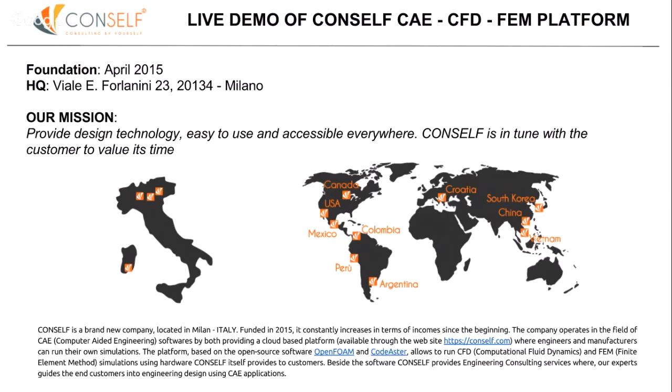The service we offer is a cloud computing service, so directly from the website, with a simple registration using an email and password, you can access a complete CFD (computational fluid dynamics) and FEA (finite element analysis) software. These are based on well-known open source tools such as OpenFOAM for the CFD part and CodeAster for the finite element part. Directly from the website, it is possible to upload a step file, create a mesh, run the simulation, and also analyze the results, like we are going to discover today during this live webinar.

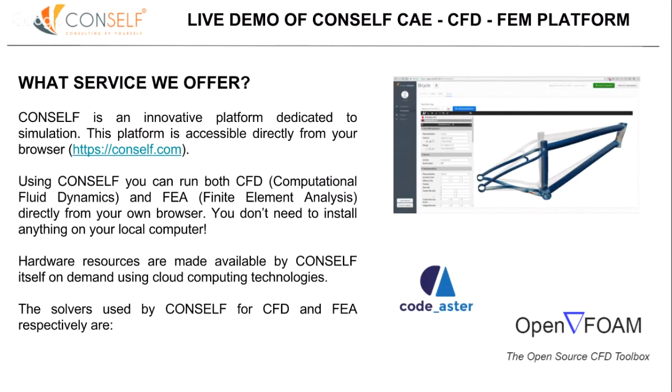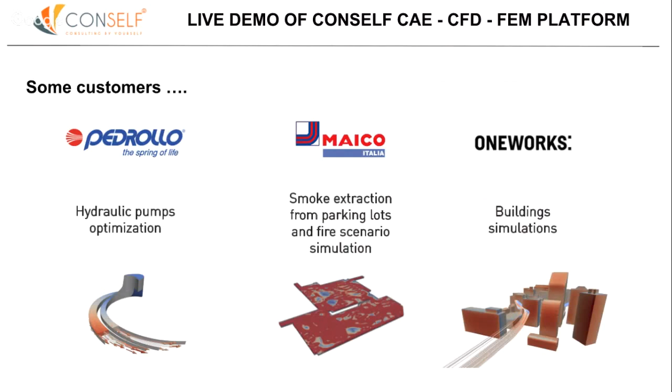Some of the customers currently using the application are Pedrollo, Maico Italia, and OneWorks. We picked these three customers because of the fields where they apply the simulations: the first field is pump analysis for Pedrollo. For Maico Italia, we have fire scenario simulation in car park lots. And for OneWorks, we have building simulations, so city and pollutant distribution in a city, but also wind pressure on buildings analyzed to calculate the structure of the building.

So now we are entering a little bit more into the details of today's webinar, and we are going to discover how you can simulate a simple impeller using Conself.

I added here 2 or 3 pictures to make the simulation we're about to run as clear as possible. On the left-hand side is an impeller, a particular tool that, through a rotation occurring along the vertical axis in this picture, creates a suction force for the fluid - water in particular. Because of the centrifugal force, this fluid goes through the channel and exits radially through the impeller, in all radial directions.

This is a complete impeller, but we are just interested in a slice of it. Why? Because we can take advantage of the axial periodicity of the impeller, so we just simulate 1/8 of the total impeller in order to save computational power and be as accurate as possible with the least amount of cells.

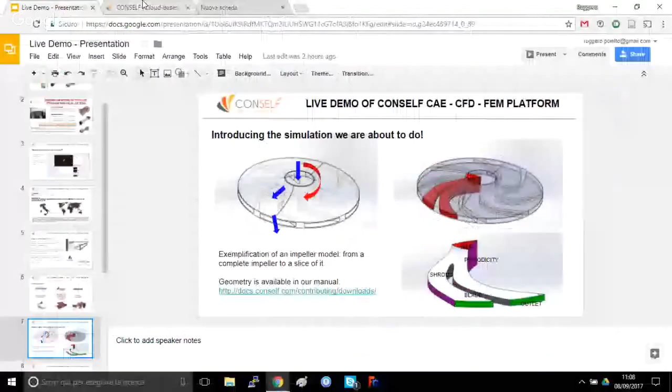So we are moving now to see the Conself CFD simulation. I am on my own browser, Google Chrome, but you can use any browser you want. To access the application, you have to go under the My Account page.

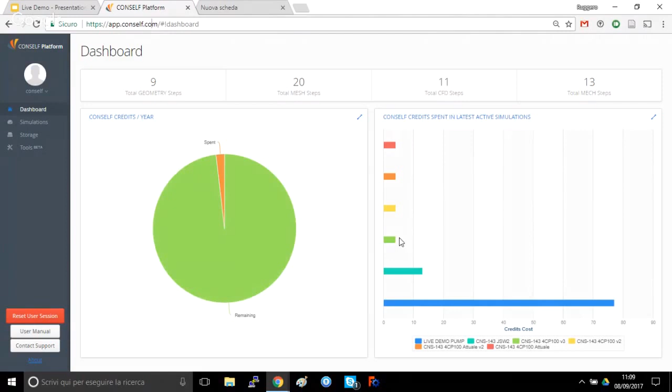Login, if you haven't done that already you can register using any email address and defining a password, then click the big button Start Your Cloud Simulation. This redirects you to app.conself.com, from which you can actually start the simulations.

So today's webinar is a simple pump. I'm about to create a new case, naming it pump. The new case uses the CFD Turbo single rotating frame application, so I click on the create button. Sorry, I did it wrong, so I just retype pump, reselect the application, and click create.

After the page loads, I am redirected to a guided procedure from which it is possible to define the simulation. The first thing we have to do is upload the file. As I said previously, we're going to use our manual to download the file to our local machine and re-upload it to the system.

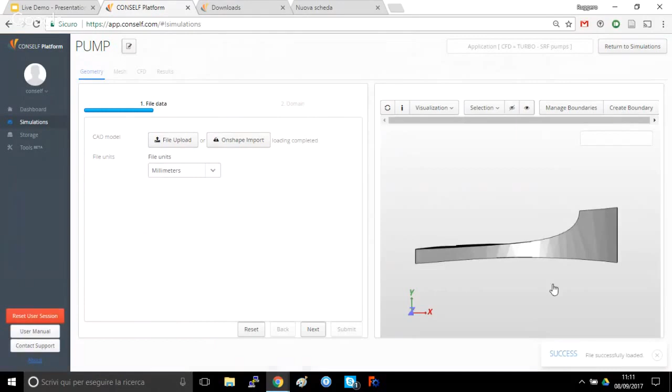So we use downloads, and there is a number of files available to users for their own tests. This time we use the Impeller fluid.stp file. We simply click it and it downloads to my computer. So from here I can upload this file: go to downloads, Impeller fluid, open. Most step files are rather small in size, so the upload won't take long. This is the Impeller as we saw previously in the presentation.

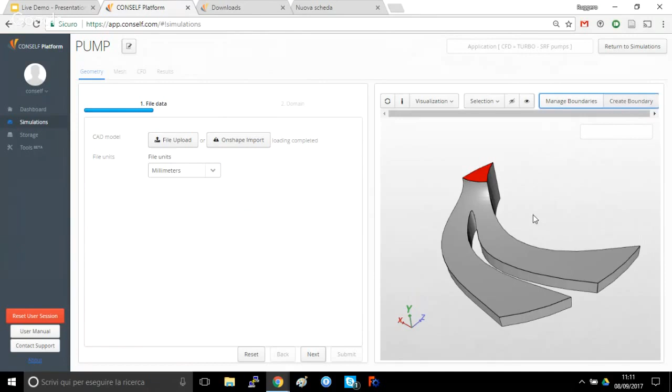The first thing to do in Conself is the definition of the surfaces group, as we saw earlier. We click on the top surface, it becomes red, we create this and define it to be an inlet. We click on the outlet surfaces.

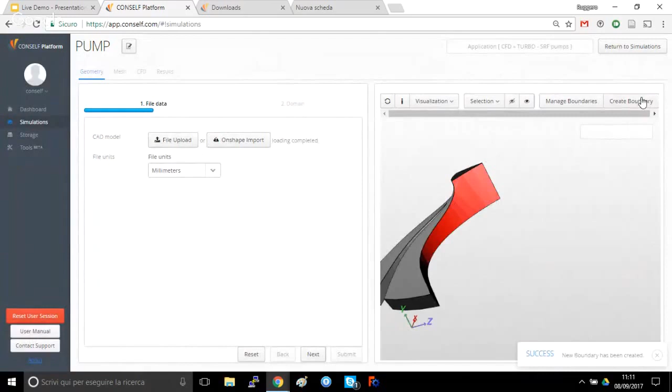Then we have the two periodicity surfaces, so we call them perio1 on the left hand side, and create boundary perio 2 on the right hand side. We also have the blade at the center of the impeller, and the top and bottom surfaces are instead hub and shroud.

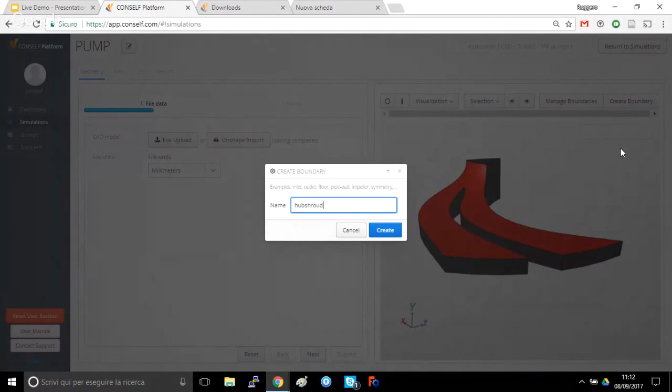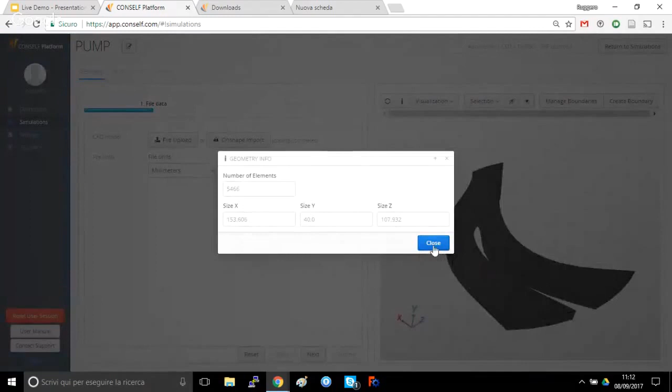So now the full geometry is defined, there are no more free surfaces to define, and I can proceed with the guided procedure to set up the simulation. I click on the information tool to know the bounding box, the maximum dimension in X, Y, and Z - as you can see it's 107 millimeters in the Z direction, so I leave the file units as millimeters.

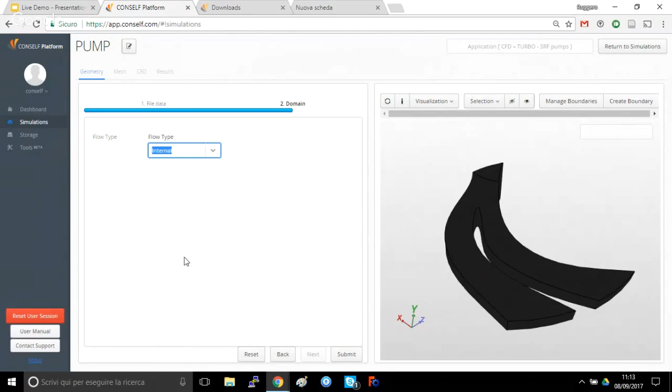I can proceed with the definition of the flow type, and in this particular app I only have one option available, so there's nothing much to say. I click submit and press run.

As you can see, the process now runs in the background, and it does not run on my own computer but is performed on the Conself server. All the computing power required to run the CFD or finite element analysis is taken from Conself, rented by the user, and as we'll see later, the pricing scheme takes into account only the computing power used by the user in a pay-per-use system.

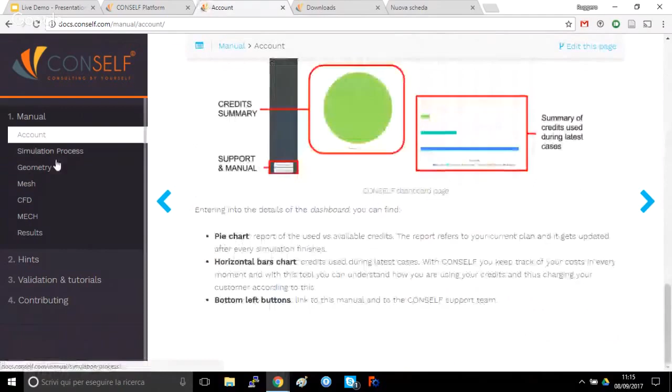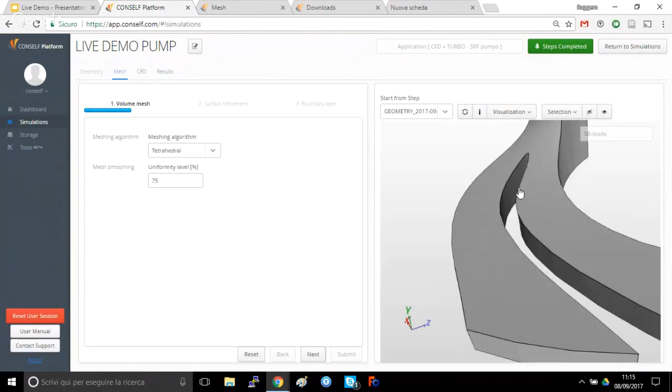This step is taking a little time, so we're going to use a previously prepared simulation to see what happens after the geometry. After the geometry, what we have to define is the mesh. I have the geometry available as specified in the previous simulation, and step by step I have to define all the input parameters to define a mesh.

The first parameter is the meshing algorithm, which for this particular case, related to single reference frame rotating pumps, we suggest using the tetrahedral meshing algorithm. Then there are other parameters such as the uniformity level, which for this case we impose to be 75%.

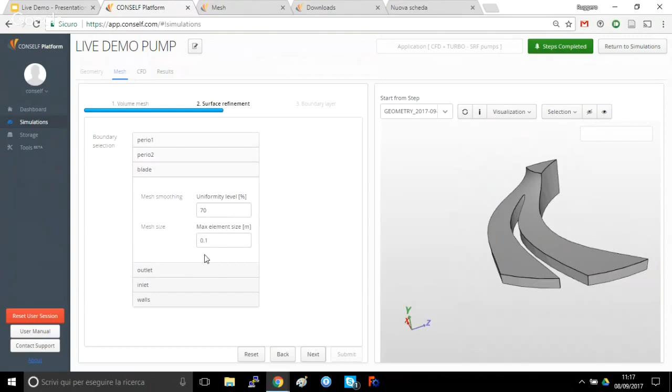I carry on imposing the input data we discussed, and move to the next section, which is useful to define the boundary layer. This is an extra refinement, very useful to be applied on all surfaces where we want a wall boundary condition. In our case, the wall boundary condition is going to be applied on the blade.

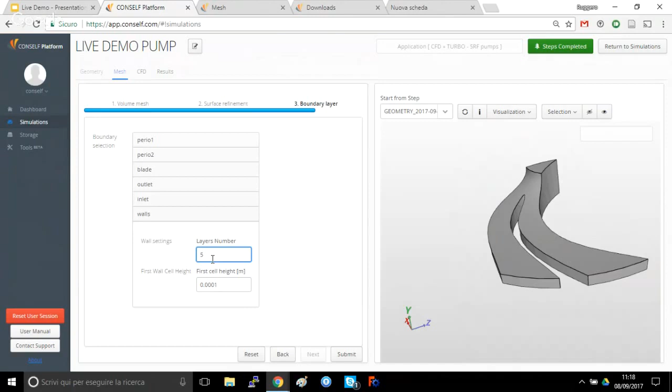On the blade we apply a certain number of layers with the first cell height to be 1/10 of a millimeter, so 0.0001 meters. But this is not the only wall we have in our simulation - we also have the wall boundaries, which are the top shroud and the bottom hub. On these two solid boundaries, we apply an extra refinement of 5 layers of cells, with the first layer height also at 1/10 of a millimeter.

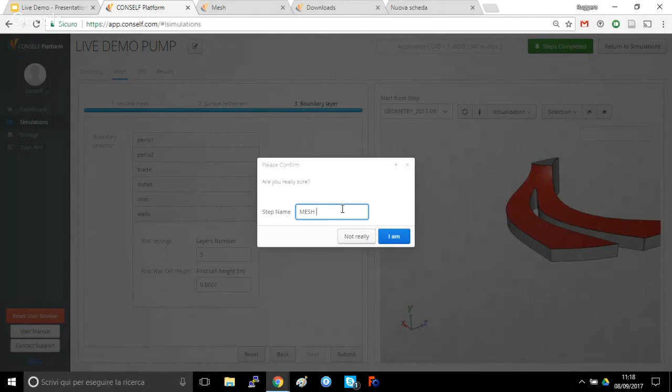We submit the mesh now, and it's possible to give a name to this particular mesh, so we call it 'mesh tutorial'. Now when I click, the system automatically takes into consideration the mesh which has to run, and here it is.

The process runs in the background. As we can see, it's possible to run a very high number of processes together on the system, and these processes are simulated and processed by our system. Most of the time the queuing time is rather limited, within about 10 minutes, and we have a scalable system underneath, so all processes are taken one after the other by the system.

Because of the limited time I have available, I'll proceed using a previously run mesh. I'm just going to select a mesh which I previously defined.

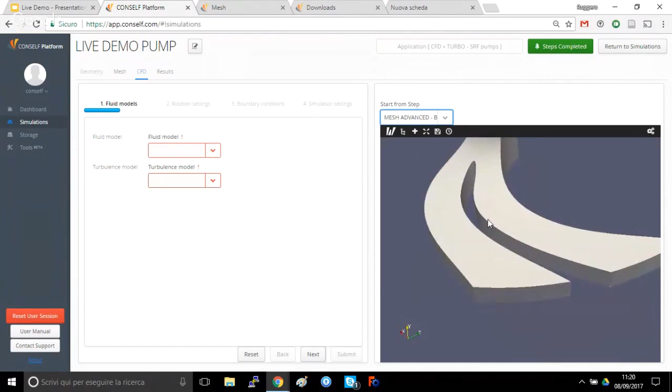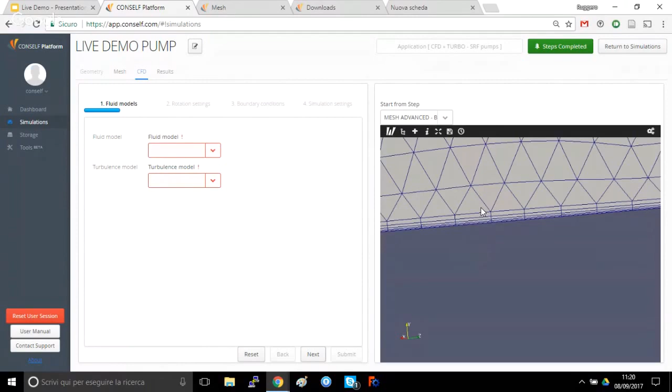Automatically on the right hand side I can see the impeller again, but this time it's not just the impeller, it's the volume of fluid divided into a number of fluid volumes, as we can see. You need to get familiar with the number of inputs - here we can see the layers number, the imposed boundary layers, and the internal mesh on the inside of the impeller.

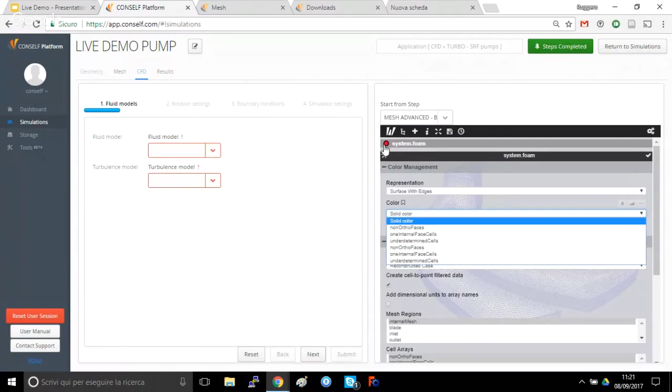Well, now that we are happy with the mesh, obviously there is much more to say, like reports about mesh quality, which are actually given by Conself as non-orthofaces, and a number of variables from which you can extract problematic cells out of the mesh.

You can proceed with the definition of the fluid model, incompressible, and the turbulence model, which I suggest you to use Spalart-Allmaras. But we also have available standard K epsilon and K omega SST turbulence model.

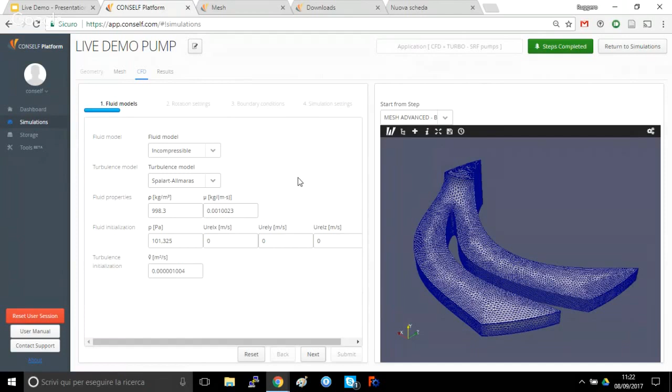So I can move on and apply the rotation to the impeller. This particular app we are using is a single reference frame system. So all the fluid volume is defined as in rotation. So everything we have to define is a center of rotation and a rotational axis, which is the vertical axis

in y direction. The rotational speed, as most of the time for pumps, is about 1,500 RPM here in the EU, where the frequency of the current is 50 Hertz. Obviously, in other countries, this value might be slightly different.

We can proceed once again and define the boundary conditions for all of these. So we can define the periodicity rotation for period 1, and once again, the periodicity rotation also for period 2. Then we have the blade, which is a rotating no slip with obviously a 0 rotation. Remember that this 0 is a relative rotational speed, so it is a rotational speed relative to the rotational speed of the fluid volume.

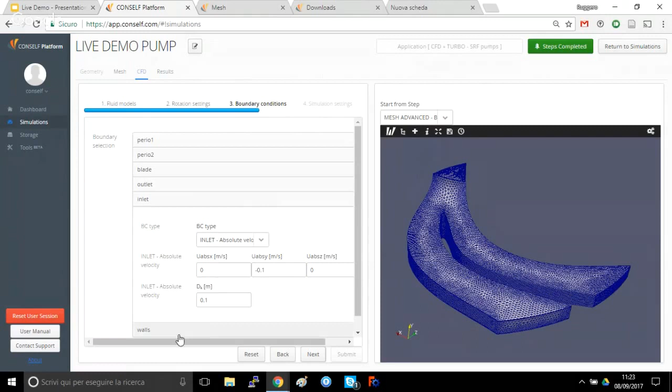Then we have the outlet, for which we just define a pressure outlet. And we also have the inlet, for which we want to apply an inlet absolute velocity of minus 0.1 meters per second, so vertical direction inwards, inside of the domain. The last boundary is once again the wall boundary, which represents the hub and shroud, so top and bottom walls, let's say, of the impeller.

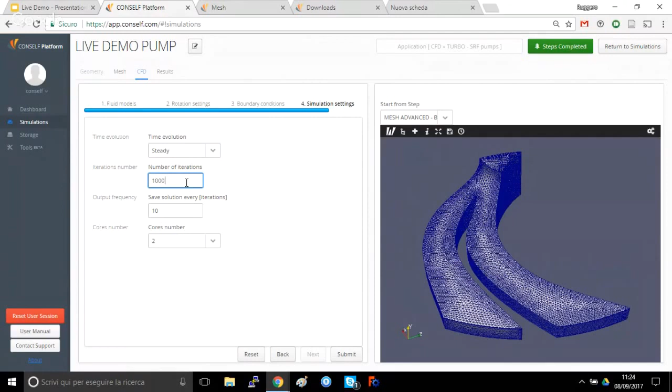And we can move on to the time evolution of the simulation. We just want to run a steady simulation. We suggest to run 1,000 iterations and to save every 100 iterations. So we are about to save 10 different plots of the solution, because 100 times 10 becomes 1,000.

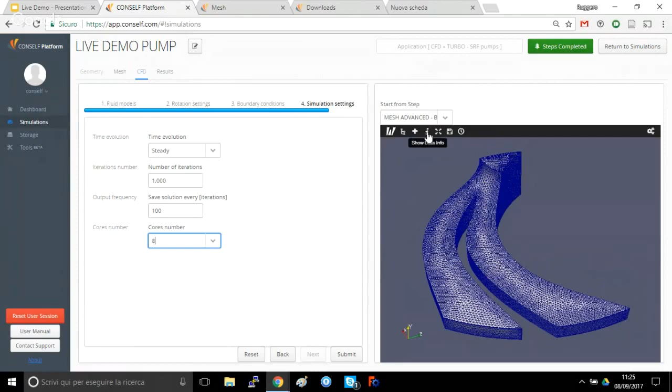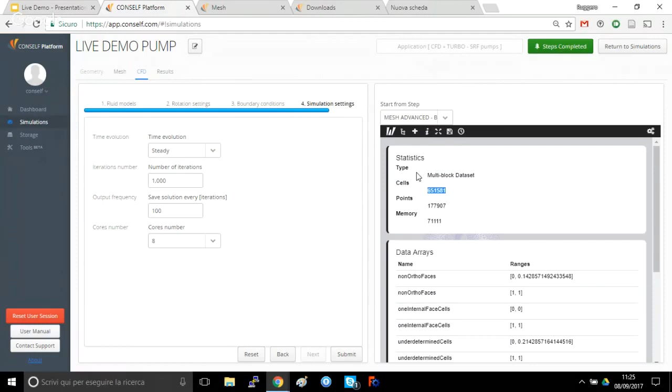And then it is also possible to select the number of cores on which we want to run the simulation. The number of cores also defines the particular machine on which you are running the simulation. So the higher it is, the more RAM you have available. This RAM is important in case you have a very big mesh, big in terms of cells. If you click on the i over here, you can see the total cells number, which for the current mesh is about 650,000 elements.

So now we click submit, and once again we can define CFD tutorial as the name of the CFD we're running, and here it is. Now the CFD simulation is running. As we see now, differently from what happened previously, in which we were in the queue, the system has taken into consideration the steps we submitted previously, and automatically it is running them. So we don't actually have to do anything.

And as you can see, the mesh we submitted previously is now completed, it disappeared. And in 1 minute probably, also the CFD we have just submitted is going to be taken into consideration and run by our automatic system. As I said before, we move on because we don't want to stay here, but I just want you to see that now the status is running, so the simulation has started.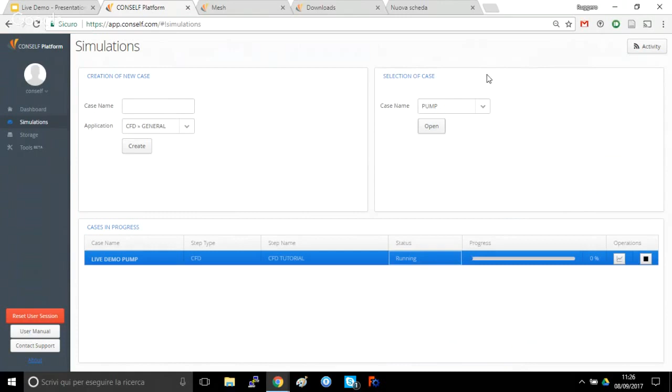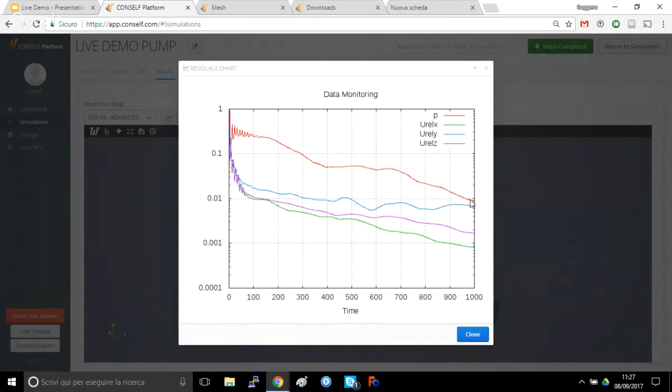So now we want to see the results of the simulation, what we have available in Conself. We just open the previous run case, we go to the results step, and here we have the same viewer we got used to so far, and it is possible to click on the residual plot. Here I have run 1000 iterations, and as you can see, all the residuals are going down. We are at a level of 10 to the -2. Probably it is worthwhile running for a higher number of iterations.

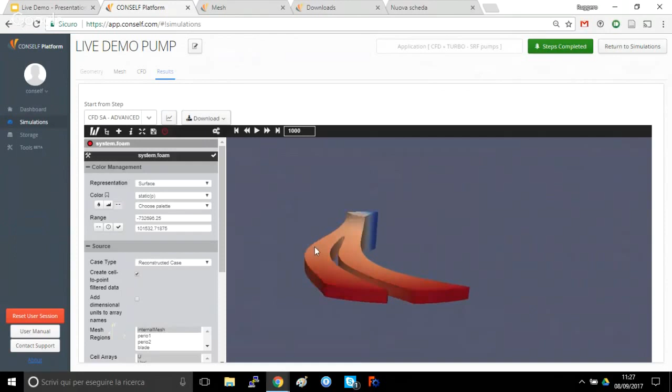And over here, once you get familiar with ParaView, it is possible to actually visualize the pressure, so the static pressure of the impeller. As we may expect, we have a higher pressure on the outside of the impeller and a lower pressure on the inside of the impeller. So this is a result we are expecting.

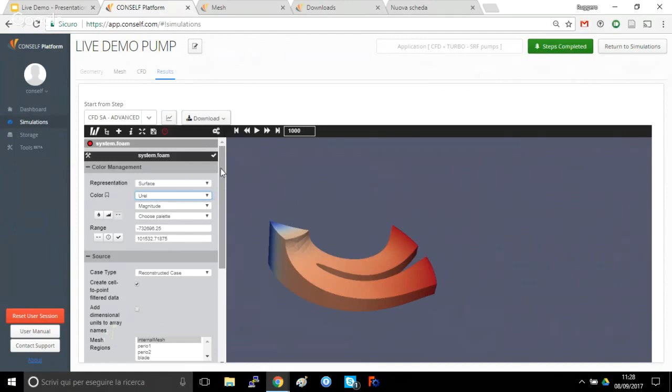It is also possible to calculate the minimum pressure and the maximum pressure, obviously. And once you get familiar with that, it is also possible to calculate the total pressure difference between inlet and outlet. At the same time, it is possible to have a view of the velocity field. So probably here we are just at the beginning, so it would take a higher number of iterations to give a more correct velocity field, but already we have quite a quick overview of the velocity field.

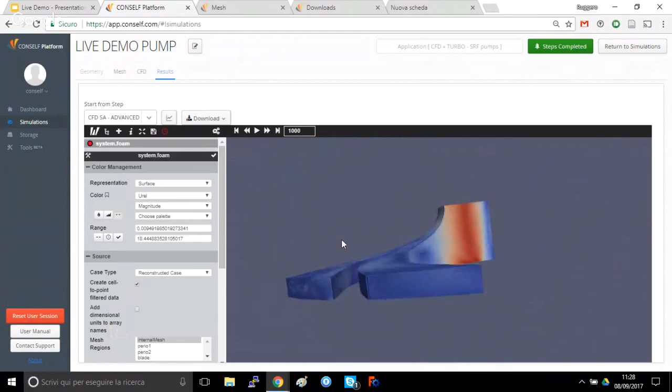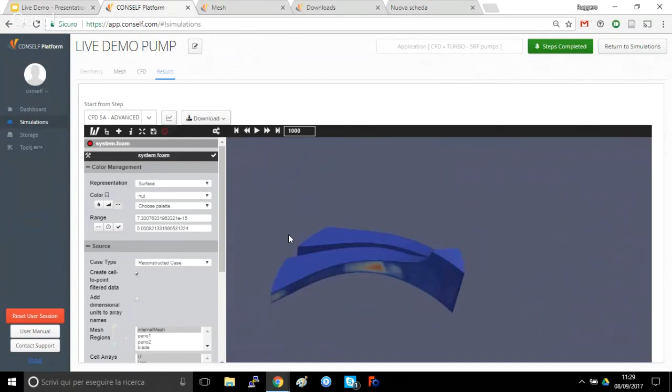Just take note of the periodicity face, this face being basically coupled with this one. And it is also possible to have an overview of the turbulence inside of the impeller. So with the turbulence, we have an idea of the area on which we want to improve the impeller, so probably over here for this particular case. And obviously, it is also possible to have the velocity, but this time not just the relative velocity, so the velocity in the relative system, but the velocity in the absolute system.

More features are available, such as downloading the results. We currently have 2 different results formats, the EnSight results and also the Fluent results. And at the same time, it is possible to click here to download ParaView, the open source data viewer we suggest you use because it's free and it is quite complete to do any sort of analysis you want. If you click on EnSight results, automatically the results are downloaded to your system. It takes a few seconds because download usually is relatively quick. And you can use, for instance, ParaView to view this result set.

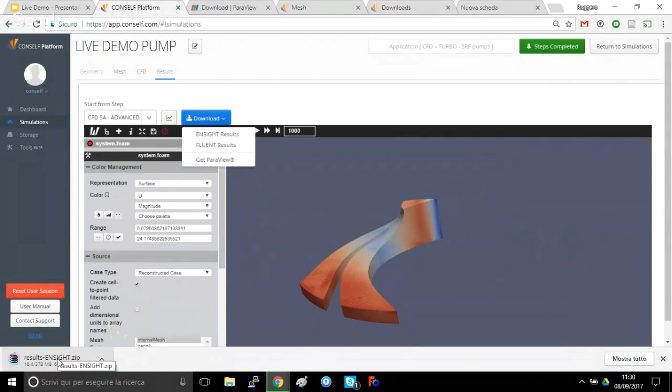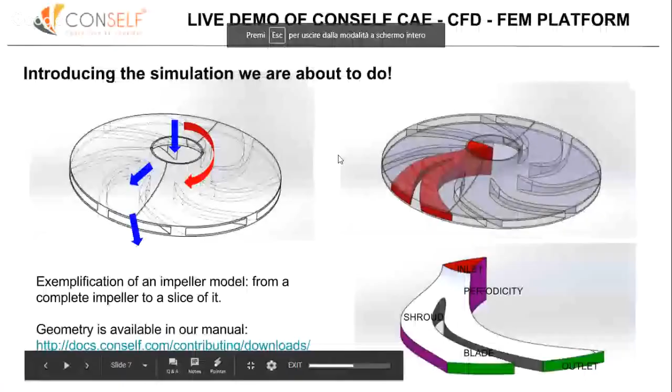Okay, probably this was a very quick overview of the application, but the intention was to make you aware of the possibilities in terms of simulation given by Conself.